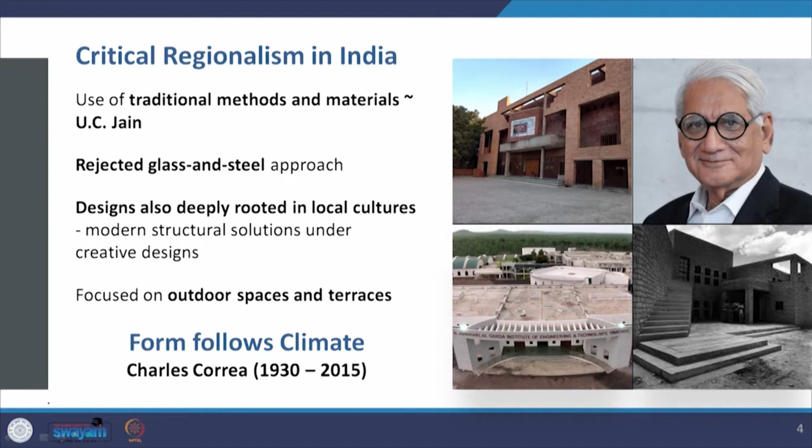Now there is also focus on both outdoor spaces and terraces, because particularly in composite climate, hot and dry climate, and tropical conditions, these spaces are very valuable. So we come to the dictum proposed by Charles Correa. Form follows function was a dictum that was the backbone of modernism. Then Charles Correa gave a dictum for modern Indian architecture: form follows climate. That is, climate plays a very important role in the kind of forms we evolve in India.

Now this may not be fully understandable by your generation, because you come across a whole lot of buildings that have nothing to do with the external climate. They are hermetically sealed glass block buildings, or completely actively controlled buildings with no link to the climate, and therefore these buildings do not follow the principle of form follows climate. They are predominantly confined to where functional quality is more important, etc. We will come to that point later.

Let us see why this kind of climate responsive architecture developed in India. Our constraint turned out to be our blessing. The problem was a lack of technology or unaffordability with regard to centrally conditioned buildings in India. As a result, architects were constrained to design in accordance with climatic conditions, and the advantage of that was a focus on the built form, which itself had to be climatically responsive.

So if I am building in hot and dry Rajasthan, or hot and humid Mumbai, or composite Delhi, or cold Kashmir, I have to keep the climate in mind. Now a building based on this would be very region specific, but it would still be a modern building, built for modern use and a modern generation, that responds to the local climate. That makes it a critical regional building. If I were to remove every other factor involved in critical regionalism, like culture, this one constraint of climate alone would be enough to make it critically regional.

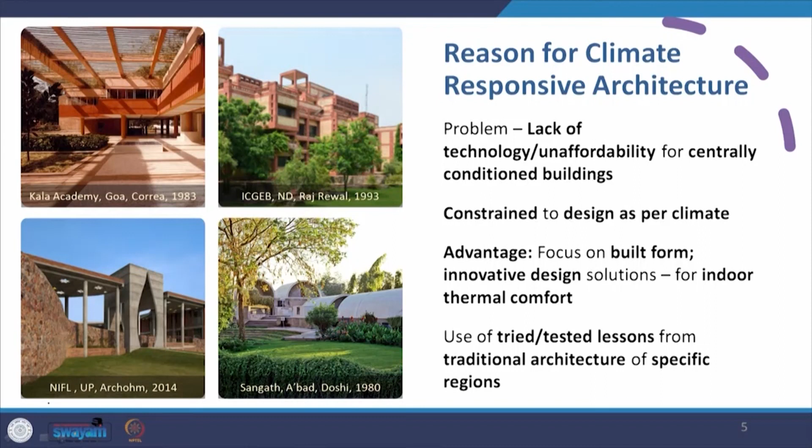So the use of these tried and tested principles, evolved over centuries in a region, were adopted by architects in modern architecture - whether it was the Kala Academy in Goa by Charles Correa, the ICGEB building in New Delhi by Raj Rewal, the NIFL by Archohm in 2014 in Uttar Pradesh, or Sangath by Doshi in 1980 in Ahmedabad.

So the advantage through traditional architecture was that iconic building forms and aesthetics gave rise to a truly modern Indian architecture. This was an application of cultural and regional context along with climate, evident in the spaces and in the materials.

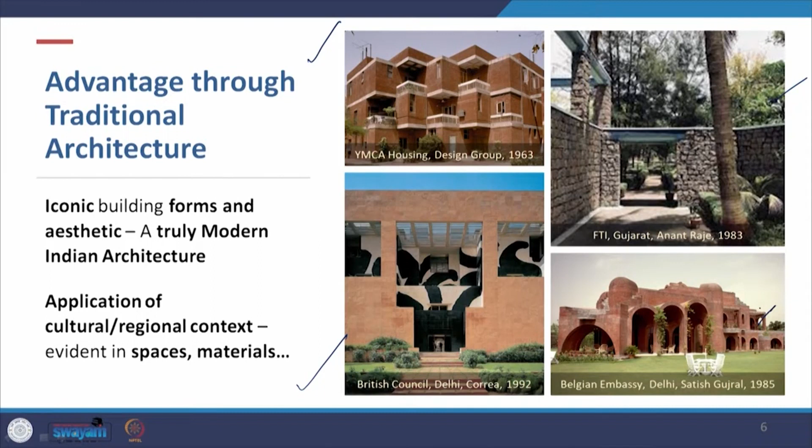For example, the YMCA housing by the Design Group in 1963, the FTI building by Anant Raje in 1983, the British Council in Delhi by Charles Correa in 1992, and one very interesting building not by an architect but by an artist, Satish Gujral - the Belgian Embassy in 1985.

Reasons for climate responsive architecture in the 21st century - there are serious reasons. Now why am I stating this? I am telling you why we need to go back to this.

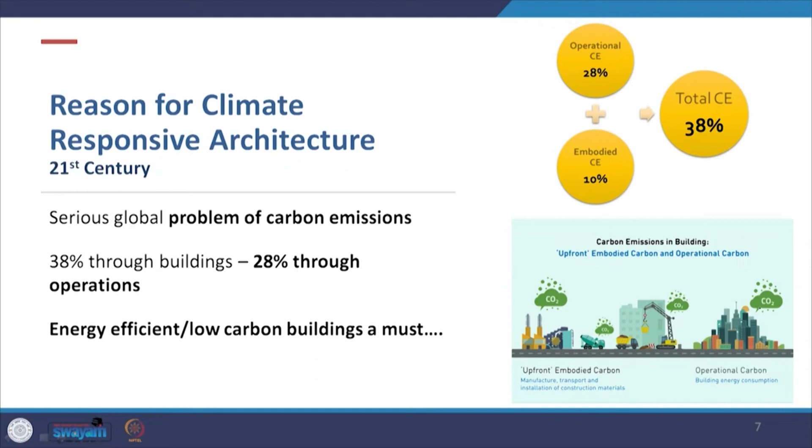There has been a period when we have gone to active control buildings, making buildings that are glass and steel, glass and RCC, completely enclosed, having nothing to do with the climate outside. Whether the building was in Mumbai, Bangalore, Delhi or any other place, it was identical, and whether it was in these cities or cities in Europe, the Middle East or America, they are identical.

Now coming back to the problem in the 21st century, the whole cycle is coming around. Why? Because we have a serious global problem of carbon emissions. 38% of carbon emissions are through buildings, 28% through operating the building. Therefore we need energy efficient, low carbon buildings, because our Prime Minister is committed that India will become carbon neutral by 2070.

Therefore, buildings have to really pull up their socks, and our architects have to pull up their socks and make the buildings low carbon. The only way to do that is to make them energy efficient. That is one of the most significant ways in which we can do that. Therefore, the use of climate responsive architecture, solar passive architecture becomes vitally important.

We see that appearing in these 21st century buildings: the IILM building by Morphogenesis, 2013 in Noida; Sanjay Puri's house, the 18 Screens in Lucknow, 2019; the Wall House in Auroville by Anupama Kundoo, 2000; and the Indira Paryavaran Bhavan by CPWD, 2014.

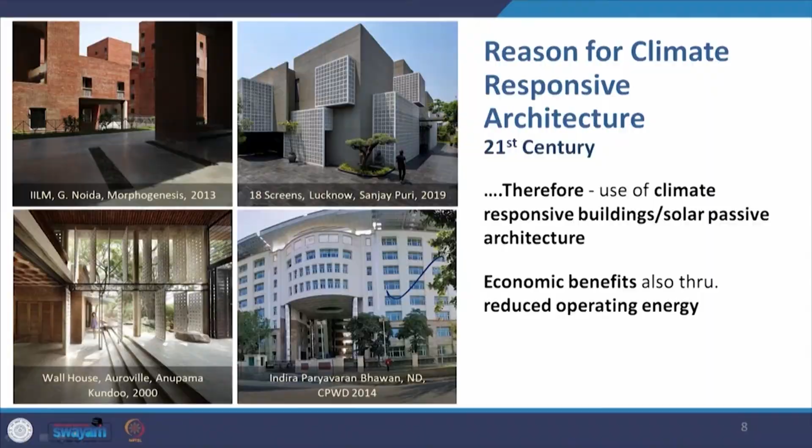So there is a whole coming back to an architecture which is modern but also governed by the climate, or is climatically responsive. There are also economic benefits by reducing operating energy, obviously, but that is for another time.

Now when we design energy efficient or green buildings today, these are the aspects we focus on. Three different types. Number one, they are highly engineered. They are hermetically sealed like a normal actively controlled building, but designed in a manner to achieve high energy efficiency within active control.

That means the building may not be directly dependent on the outdoor climate, but it is designed to be highly energy efficient with the very systems it uses. So there is no impact of external climate, but the engineering solution is highly efficient. For example, the Cisco building in Bangalore.

Second, the use of climate responsive solar passive techniques, totally dependent on that, not on technology, as done by Antonin Raymond in the first modernist building he built, or by Corbusier, Doshi, Correa, or this house by Shirish Beri in Kolhapur.

Third, hybrid mode, advanced as well as climatically responsive, as done in the IGBC building in Hyderabad by Karan Grover, the first platinum rated green building, I believe, in the world and definitely in India. Here he has used both passive techniques and active techniques.

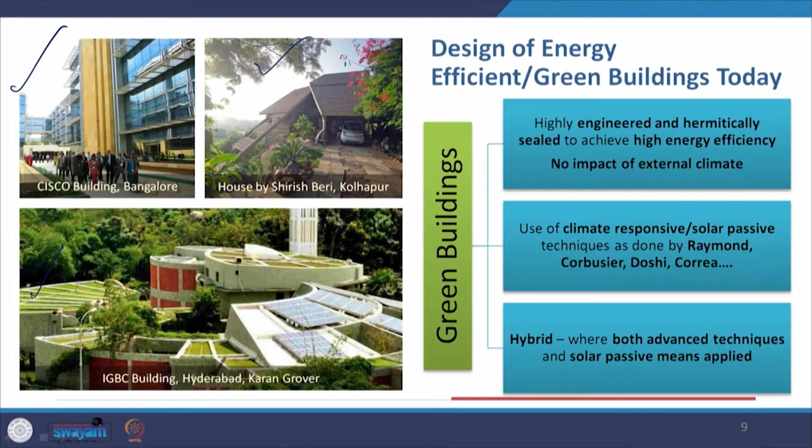He has used active methods like PV panels, and highly energy efficient systems within the building, to make it a green building, or a bioclimatically sound, climatically responsive building.

Now earlier the techniques being applied were based on observational data, on the empirical data of traditional architecture of a region. But now there is accuracy in our prediction of building behavior from the design stage, because we have simulation modeling and digital tools and techniques to predict that behavior.

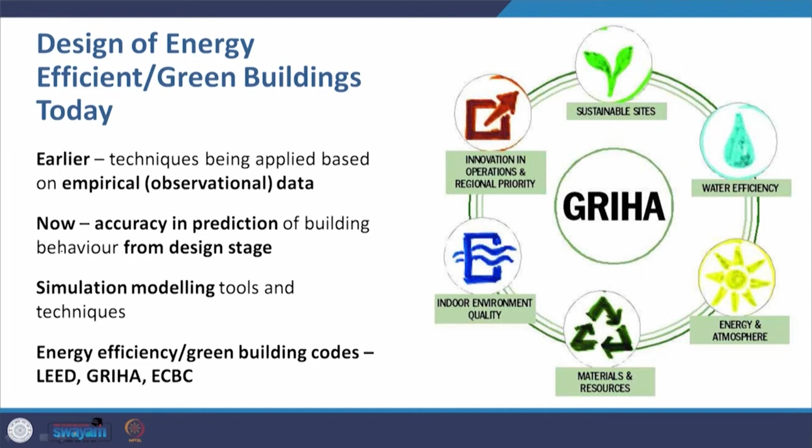Today, for example, when Morphogenesis designs the jalis of Pearl Academy, which we will study as a case study, they design that with proper solar analysis. It is not some kind of random hit and trial based on a traditional model, but a traditional model adapted to a modern building with proper, sound energy analysis. The building once erected will behave in a certain manner that has already been mathematically predicted.

Therefore, we have also got energy efficiency green building codes like LEED, GRIHA, the Energy Conservation Building Code, etc., to design these buildings. Let us come to the case studies of critical regionalism.

Let us come to the Tube House in Ahmedabad by Charles Correa in 1961 to 62. It is a prototype low income housing, and its shape is designed in such a manner to bring cool air naturally drawn into the building and leaving via a vent close to the roof, creating a natural convection current and thus modulating the temperature within the building.

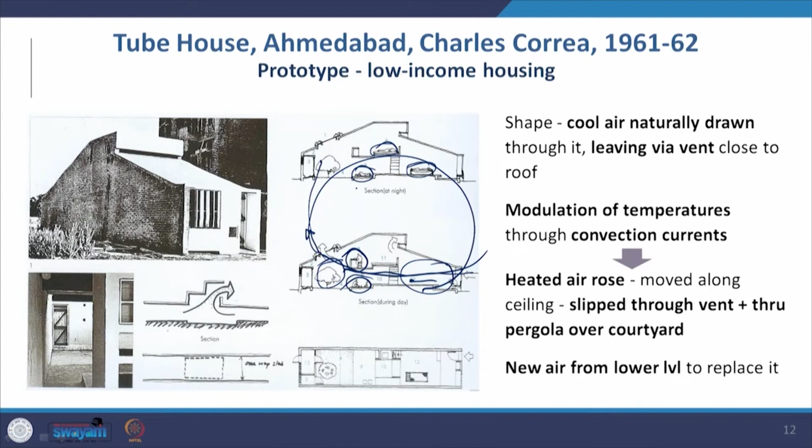This becomes a sleeping platform, a sleeping area. So Correa designs a low cost project by providing multiple use of spaces in the daytime and in the night time. Now this fresh air from the lower level replaces the hot air as it rises, as I have told you, the current being created.

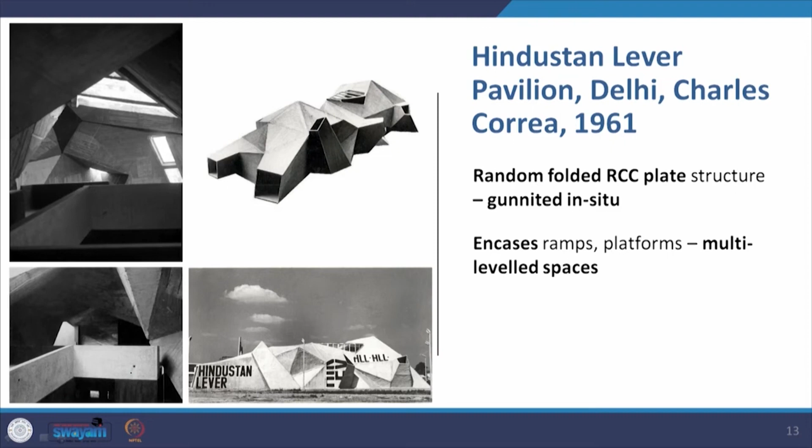He took the same idea into another project, the Hindustan Lever Pavilion in 1961. It was a random folded RCC plate design structure in gunnited in situ concrete - that means concrete cast on site through a kind of gun mechanism, like a gun shoots the concrete. So it is a brutalist building in a folded RCC plate structure.

Within it is encased all these ramps and platforms and multi-leveled spaces. What was very simple in the tube house gets very complex in the Hindustan Lever Pavilion. Here again, not only is the convection current created, but also it is the multi-level spaces that lead to the generation of the convection current.

One of the things we keep in mind when we want to produce convection currents is to have enough height in the project. That is why if you look at some of the old buildings, the bungalows during the colonial times, you find they've got a lot of height. Even buildings made in the Mughal times have enough height, because they knew hot air will rise up and the cool air will stay below, and where you have your living space you will have cool air. That would help in the generation of convection.

Now because it is a modern building and levels are important here, the levels within this larger envelope are able to create that height, as in the tube house, so also in the Hindustan Lever Pavilion. Therefore this natural cooling principle functions here also.

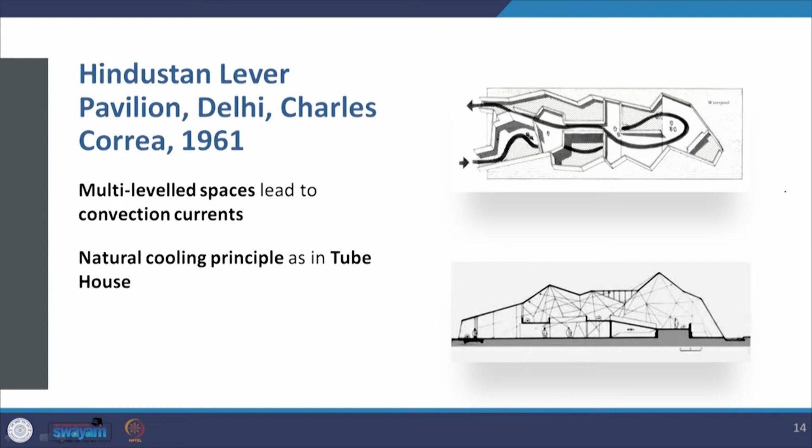Now there is also the architectural part of it. Like I told you, the very fact that there was a climatic response led them to innovative design solutions, led them to explore tradition and culture, and led them to create spaces that were responding to what a modern Indian building would be.

The ritualistic pathway is one of those things that Charles Correa repeatedly used in his projects. For example, what is it? It's like the concept of creating a pathway through a museum or an exhibition space which is like an Indian street - a metaphor for an Indian street, like the way you would move in an Indian village, or the way you would move in a temple, or the way you would move in a palace.

So you find that in the National Crafts Museum, he creates this ritualistic pathway so that you can follow the exhibits as you move along. He did that earlier in 1958 in the Delhi Handloom Pavilion. He does that in multi-levels in a subterranean structure in the Bharat Bhavan in Bhopal in 1975 to 81. He creates this kind of moving pathway in Jawahar Kala Kendra.

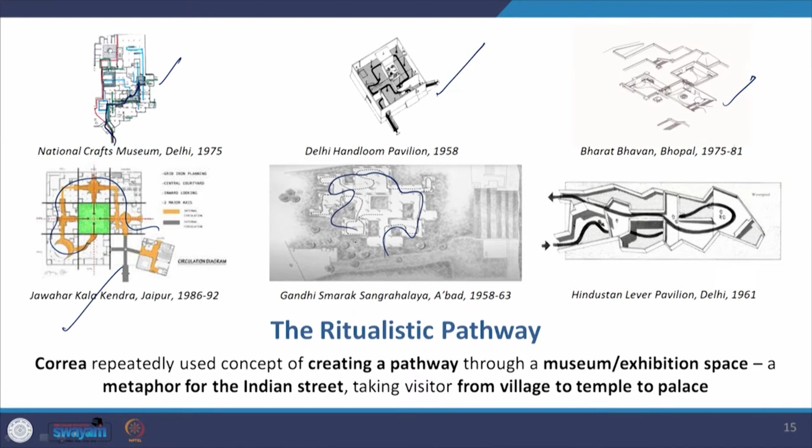He did that in the village form of the Gandhi Smarak Sangrahalaya as you move through it, and also in the Hindustan Lever Pavilion in 1961.

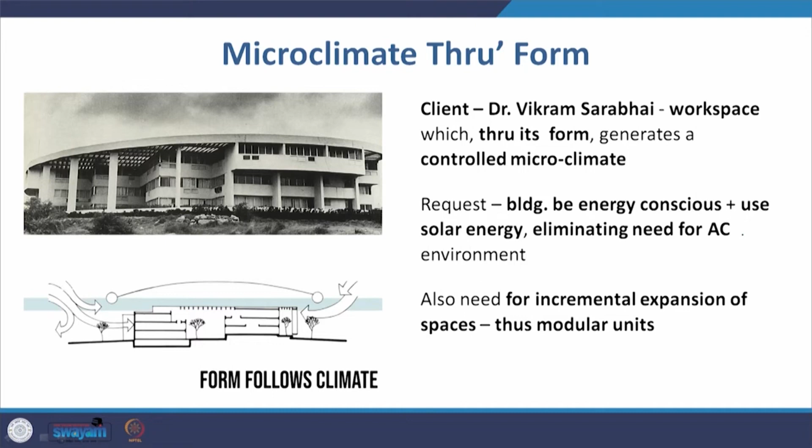Let's come to the ECIL complex in Hyderabad, 1965 to 68. The client was Dr. Vikram Sarabhai. The workspace, through its form, generates a controlled microclimate. That's what he wanted, that it should generate its own microclimate.

The request was to make the building energy conscious in the 60s and use solar energy, eliminating the need for air conditioning. Therefore, there was also a need for incremental expansion through modular units. Incrementality has always been an important part of the work of Charles Correa.

The solution was a number of modular units arranged in a cruciform shape. This is, say for example, one unit. It's separated to provide natural light and ventilation to the office area.

There are separate modular units put together around, for example, a courtyard, ramps, pathways, and there is an overarching pergola on top of the whole thing. This is done to create that microclimate.

To minimize heat gain, these three cruciform units were sealed off from the east side. The units were indented into a cruciform to bring more daylight into the workspaces, so that if it was one building, you would get daylight from four sides, and the interiors would remain void of natural light.

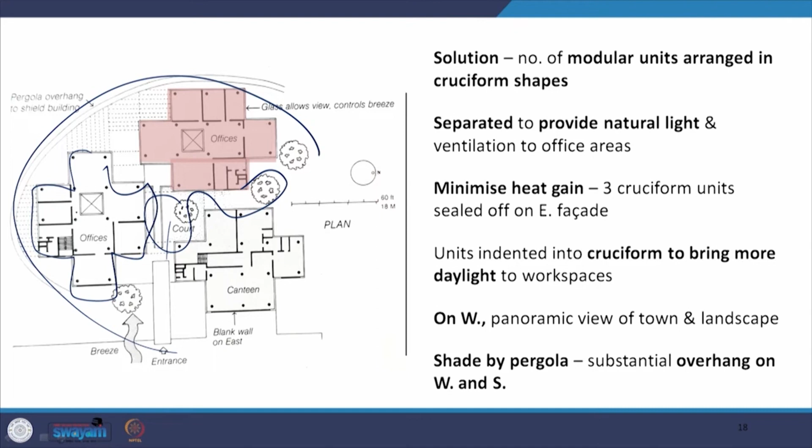Because these are cruciform plans independent of each other, each area is able to get ample diffuse light. On the west there is a panoramic view that they had to capture, and the overall form is shaded by the pergola with a substantial overhang towards the west and the south.

The roof itself has three elements in its design: a solid surface, the pergola surface or pergola roof, and a water reflecting surface that Charles Correa tried out. This was not an experiment that moved on into other buildings.

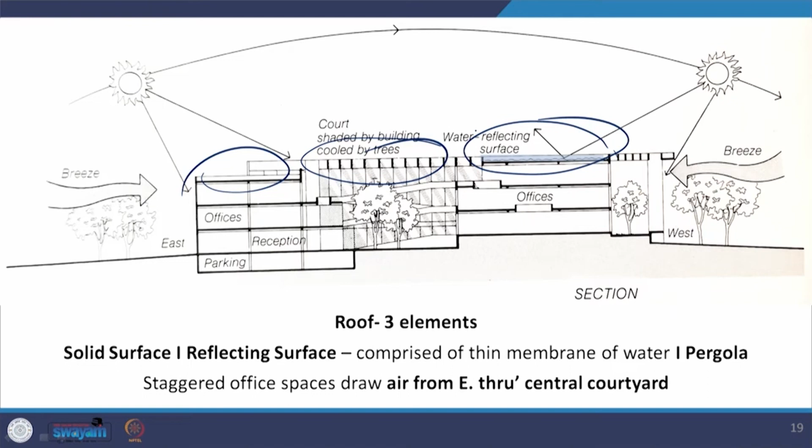He tried it out in the ECIL building, and there were staggered office spaces that draw air from the east, and then the air moves through this central courtyard space into the cruciform modular units.

Form follows climate — the importance of the section in the climate responsive design of Charles Correa. If you remember, in the Shodhan House I also discussed the importance of the section, with regard to climate, and also discussed the section with regard to the Raumplan of Adolf Loos.

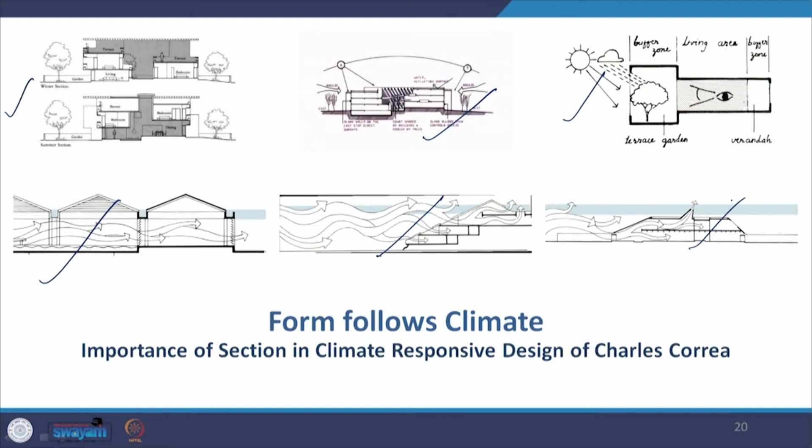Here, you have already seen the section in the Parekh House, where we talked about the winter section and the summer section. Then we see the ECIL building that I just talked about. We will look at the Kanchenjunga building, where again the section is created to respond to the climate of Mumbai, the Gandhi Smarak Sangrahalaya, the Kovalam Beach Resort, and the Ramakrishna House. In all of them, the section defines the climatic response of the building.

Here is a comparison of how tall buildings have undergone a change, and the cycle has come back to the same point. This is Kanchenjunga, a climatically responsive building, a critical regional building, designed by Charles Correa in Mumbai, somewhere in the 80s.

Then comes this period in the 21st century. We go tall — skyscrapers, this building, residential apartments in Mumbai, glass and RCC, actively controlled mostly. Of course there are balconies and all that also for the residential block, but intensively what you find is this.

Again, this project which is coming up — I think it's still coming up, I believe in Gurugram or Noida, please forgive me for that — we will be discussing this project. It's Morphogenesis's work that is coming up, and here you can find there are a series of terraces throughout the building. This building is very similar.

If you want to understand this building more clearly, and we will be studying it as a case study, we will try to relate it to the Commerzbank of Norman Foster, but it is also related to the Kanchenjunga building. With the kind of terraces Charles Correa created, they are also creating these terraces. Of course, the materials have changed, there is more use of glass, etc.

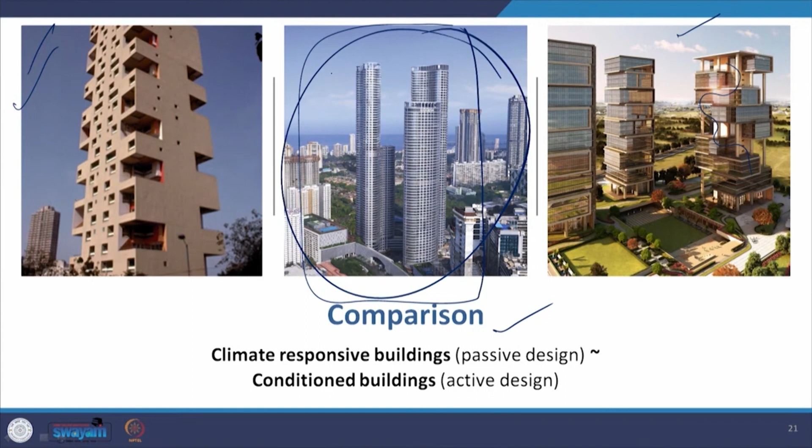But the overall form of this building by morphogenesis is totally defined by the climatic response. Climatic responsive buildings are passive design, conditioned buildings like this are active designs, but we are once again coming back to climate responsiveness, and I am really grateful for that.

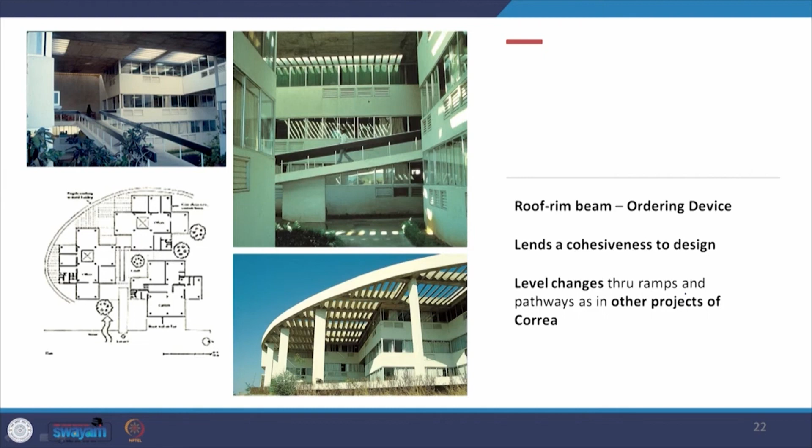Now the pergola that is provided also acts as an ordering device. It lends cohesiveness to the overall design. The level changes take place within it through ramps and pathways, as in other projects of Charles Correa, and it continues to remain one of the seminal works of Charles Correa.

Now he carried on the same idea in the MRF building in Chennai. I will go a little fast now so you can just quickly wrap it up. Already I am taking quite a lot of time today.

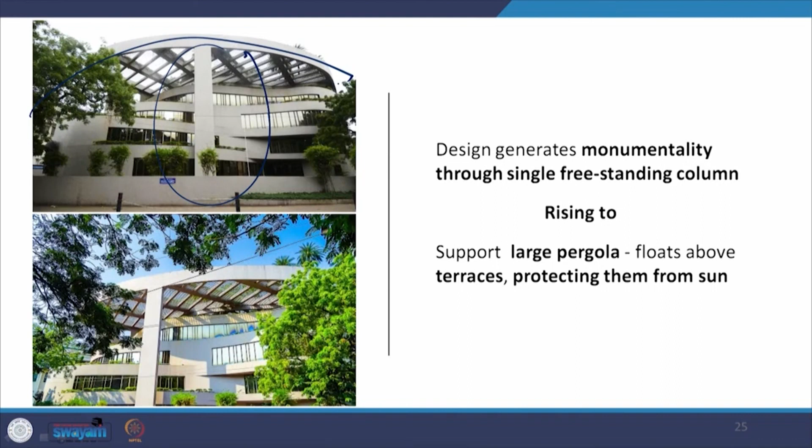1987 to 92, the design generates monumentality through a single freestanding column, and there is a pergola on top. This pergola also has a roof garden, and the overall building is protected from the direct radiation of the sun. The terraces gently flow, there are different terraces at every level underneath the pergola, and they flow along with the curve of the road that you see.

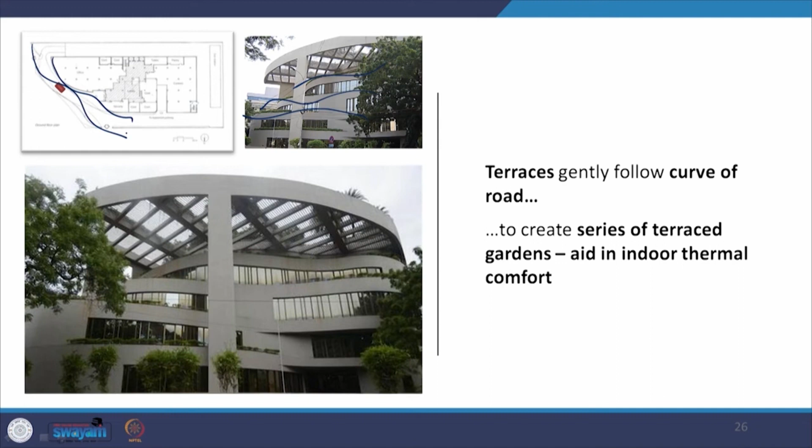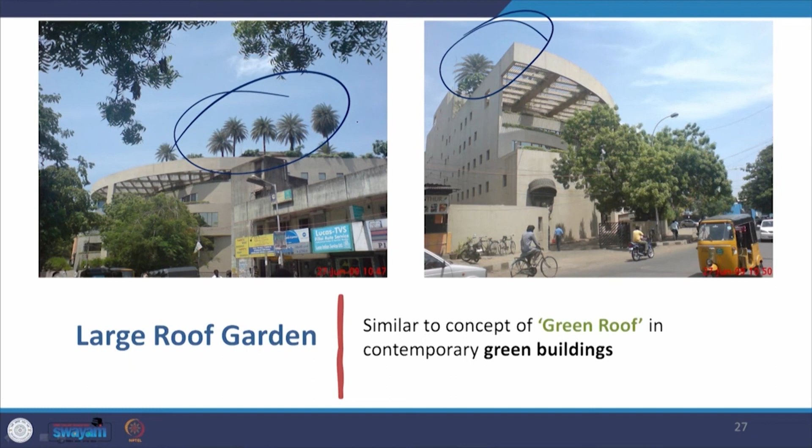This curve and these are how the terraces are created, to create a series of terrace gardens which aid in thermal comfort. And as you can see, there is a terrace garden at the top also. It is very similar to the contemporary concept of a green roof. Something that we are now defining clearly was coming to them very naturally and organically at the time.

These are some of the views of the MRF building. I will take out time just to go through them later.

And then because of these projects, Charles Correa developed a kit of parts. That means a kit putting together, and you can come up with a building through that.

So leading on from the ECIL Hyderabad, he was able to develop a built form that creates its own microclimate, and this kit of parts contained a section which will facilitate a convection current, an internal zone of microclimate, step terraces and a pergola.

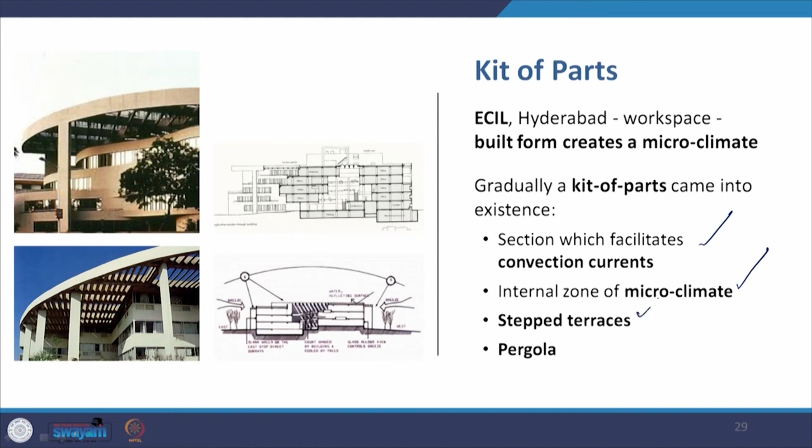And then we find that same kit of parts being used in the Madhya Pradesh State Corporation office building in Bhopal, 1980 to 92, and the LIC Jeevan Bharti building in Delhi from 1975 to 86. Variations of the kit of parts in both these buildings, both of them are of the same period.

They reflect a shift in the material configuration in Charles Correa's work. We find the use of glass, we find the use of steel in the pergola, we find the use of sandstone as a cladding material versus plastering before, and of course he was using the RCC frame earlier also. So we find that in both these buildings.

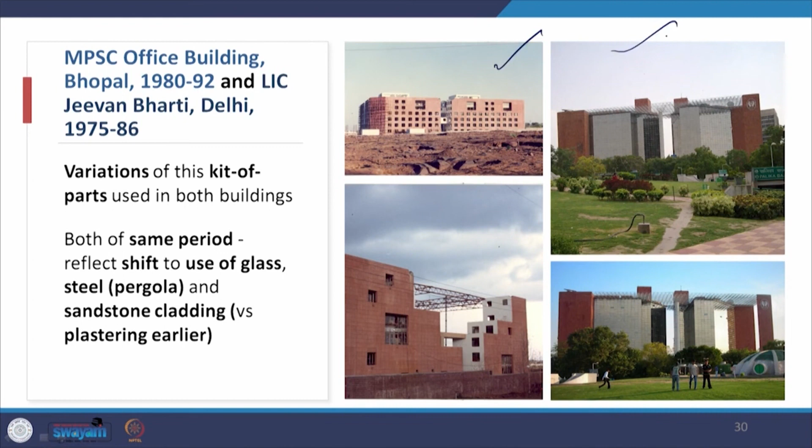Now the pergola itself is a shading device and an ordering device in the works of Charles Correa, and he repeatedly uses that. In fact, it became a kind of an identifying symbol of the projects of Charles Correa. There are many identification points that help you to know that this building probably could be that of Charles Correa, but one of them is the pergola.

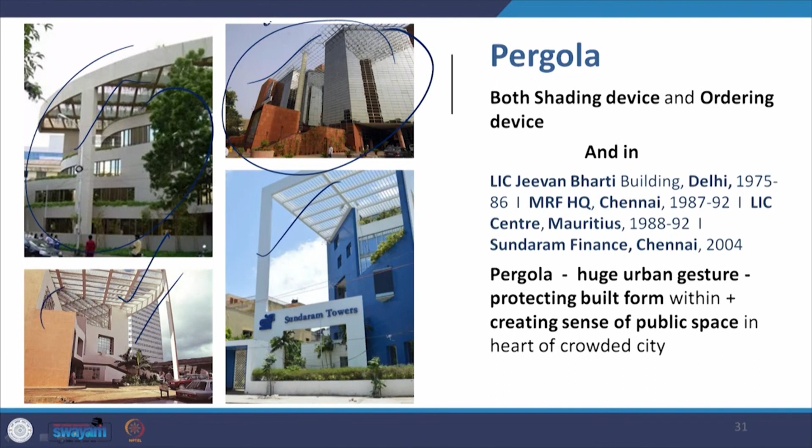So you find that in the Jeevan Bharti building, the MRF headquarters, the LIC center in Mauritius, and the Sundaram Finance in Chennai that was done in 2004. It's a huge urban gesture protecting the built form within and creating a sense of public space in the heart of a crowded city, as in the case of all of them in Connaught Place, this is the Jeevan Bharti building in Delhi, and in each of them.

The pergola is connected, joined with the pilotis, the freestanding column, and gives it that gravitas, that strength. You find that in say Mauritius, MRF HQ, ECIL building, Sundaram, and here again this is in steel, and then you have an exposed concrete freestanding column in the LIC building.

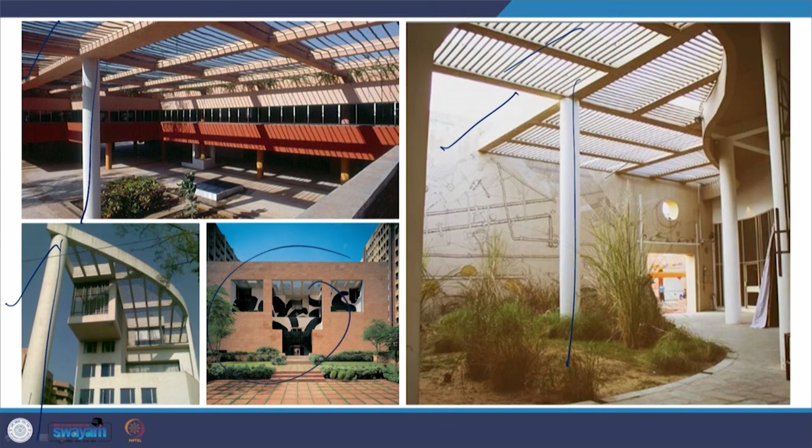And then in other buildings also, like this building in Goa and other buildings, you find him - this is in the Jawahar Kala Kendra - you again find the pergola with the freestanding column. And of course, there is a pergola in the British consulate building, but not a freestanding column.

So we will end here, and we will continue with other case studies in the next presentation. Thank you.